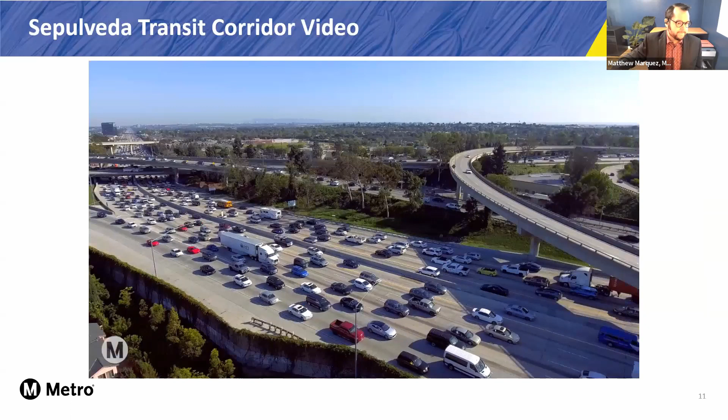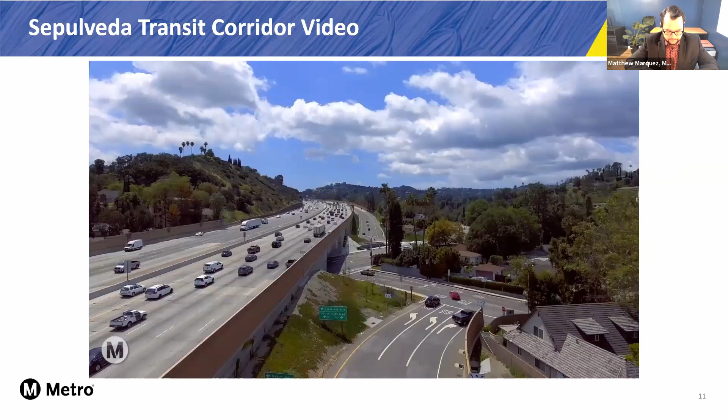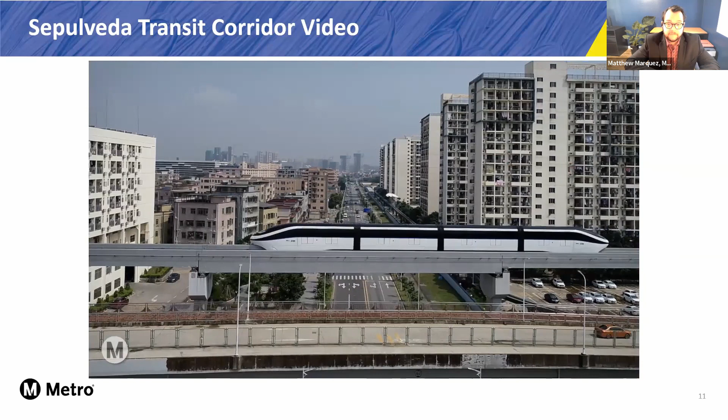Traveling between the Valley and the West Side isn't easy or fast, and traffic will only get worse over time. Metro has a plan to make it easier to get around. The natural barrier created by the Santa Monica Mountains makes this area complex and challenging, and will require innovation and multiple solutions. Metro is studying several projects in this area, including a new rail line with the Sepulveda Transit Corridor. The Sepulveda Transit Corridor project can provide reliable, high-capacity public transportation to provide an alternative to traffic and help take cars off the road. Before we get into the latest updates on this project, let's quickly catch up on our progress to date.

Metro completed a feasibility study in December 2019. The study looked at potential alternatives for traveling between the San Fernando Valley and LAX. In our extensive outreach for this study, we received more than 1,200 public comments. All of this public feedback and our technical analysis from the feasibility study has informed the range of proposed alternatives being advanced for environmental review.

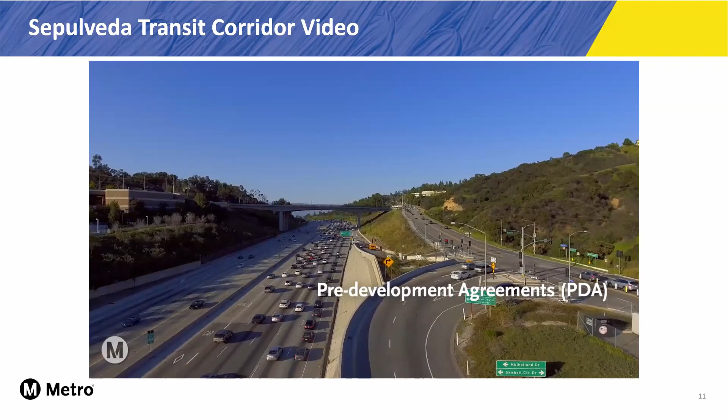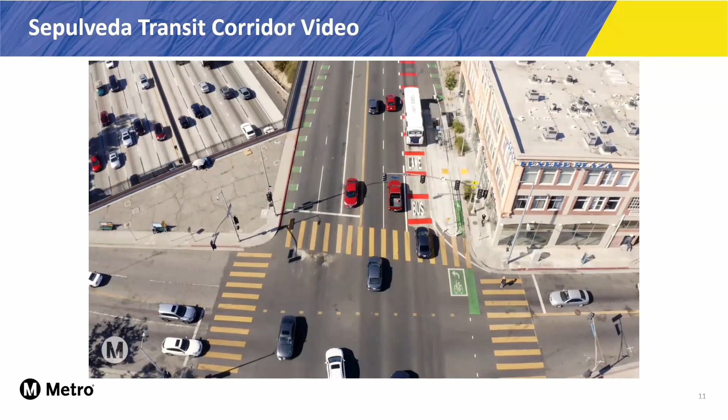In March 2021, the Metro Board approved pre-development agreements with LA Skyrail Express and Sepulveda Transit Corridor partners to pursue a potential public-private partnership to accelerate delivery of the Valley to West Side section of this project. The pre-development agreements, or PDAs, bring in teams that include designers, construction contractors, and financial partners to begin working with Metro earlier, when the project is still being planned, and long before we get into heavy construction activity. This early partnership can help to prepare designs that incorporate insights from construction and long-term operations and maintenance. This offers a life cycle approach to the project and prepares it for a possible public-private partnership.

The PDA teams worked with information from Metro's feasibility study to offer their proposed alternatives using proven rail technologies. We're now beginning environmental review. This is a formal, regulated process where Metro will study various aspects of each proposed alternative, including benefits, cost, feasibility, impacts, and any necessary mitigations. There are several points of community input during the multi-year environmental process. The Metro Board will select the locally preferred alternative, or final route and mode, for this project.

Let's look at the 6 alternatives we'll be studying in environmental review. They are identified with numbers. All alternatives begin at the Van Nuys Metrolink station, which will provide connections to Metrolink trains, as well as the future Metro East San Fernando Valley Light Rail, Metro G Line, formerly known as the Orange Line, and end on the west side at the Metro E Line, formerly known as the Expo Line.

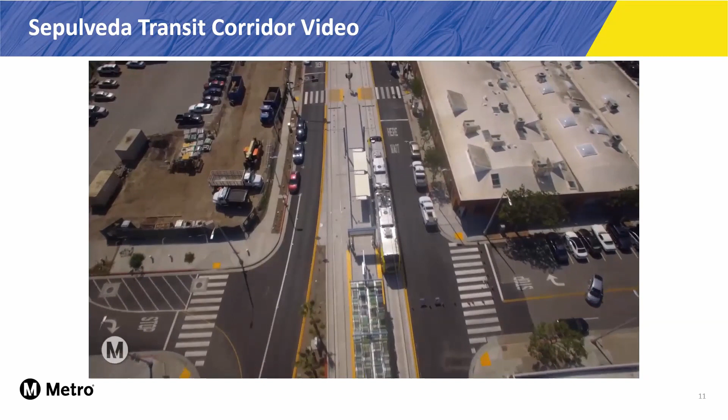Alternatives 1, 2, and 3 are monorail. Alternative 1 is fully aerial, traveling west before heading south along Sepulveda, with stops at the Metro G Line, Sepulveda Station, and Ventura Boulevard. Then it continues over the 405 through Sepulveda Pass with a stop at the Getty Center before continuing to the D Line Westwood VA Station. It then heads south to a stop at Santa Monica Boulevard to end at the current E Line Sepulveda Station. This alternative also includes an electric bus connection from the Westwood VA Station to Veteran Avenue, Westwood Village, and the UCLA campus.

Alternative 2 follows the same route as Alternative 1, but with an automated people mover connection to the UCLA campus from the UCLA Westwood D Line station. An automated people mover is a small-scale, driverless transit mode similar to what you might see at an airport. Alternative 3 runs along the same aerial route through the Sepulveda Pass and goes underground after the Getty Center to provide an underground connection to the UCLA campus.

From there, it connects to the UCLA Westwood D-Line station before returning to an aerial 405 route with a stop at Santa Monica Boulevard and ending at the E-Line Sepulveda station.

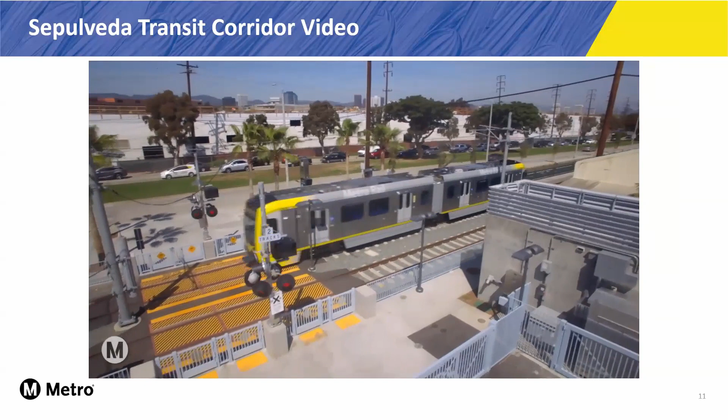Alternatives 4, 5, and 6 are heavy rail. Alternative 4 has an aerial segment along Sepulveda Boulevard before moving underground after Ventura Boulevard, where it continues underground for the rest of the route. This alternative would have underground stations at the UCLA campus, Westwood UCLA D-Line station, Santa Monica Boulevard, and the E-Line Sepulveda station.

Alternative 5 begins aerial at the Metrolink Van Nuys station and then moves underground along Sepulveda Boulevard for the rest of the route. It heads along Sepulveda with underground stations at Sherman Way, the Metro G-Line Sepulveda station, Ventura Boulevard, UCLA, the Westwood UCLA D-Line station, and Santa Monica Boulevard before ending at the E-Line Sepulveda station.

Alternative 6 is entirely underground. From Van Nuys Station, it heads south under Van Nuys Boulevard, stopping at the G Line Van Nuys Station and Ventura Boulevard. From there, it continues with stops at the UCLA campus, Westwood UCLA D Line Station, and Santa Monica Boulevard, before turning west to end at the E Line Bundy Station.

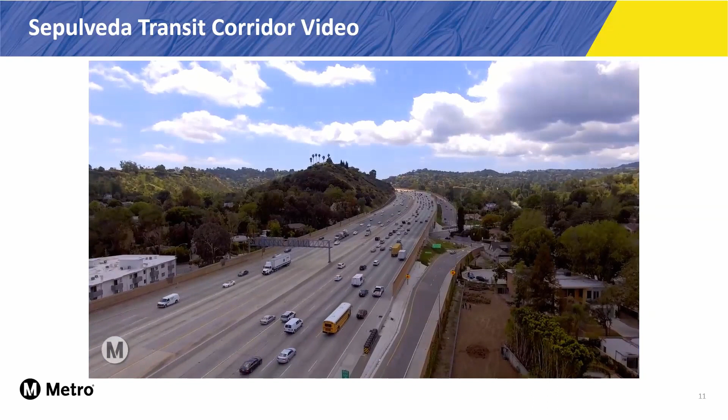We're now entering scoping, which is the first step in the environmental review process. During this stage, we want to hear from you about what Metro should consider and study as we prepare the environmental impact report for the Sepulveda Transit Corridor. Possible comments might include input on the destinations you think are important to serve, your preferences for transit in this area, and questions or concerns you might have about project impacts.

We will be conducting virtual scoping meetings where we can hear your comments. We will also take formal comments via mail, email, our website, or over the phone during the scoping period. We appreciate your interest in this transformational project and look forward to hearing from you.

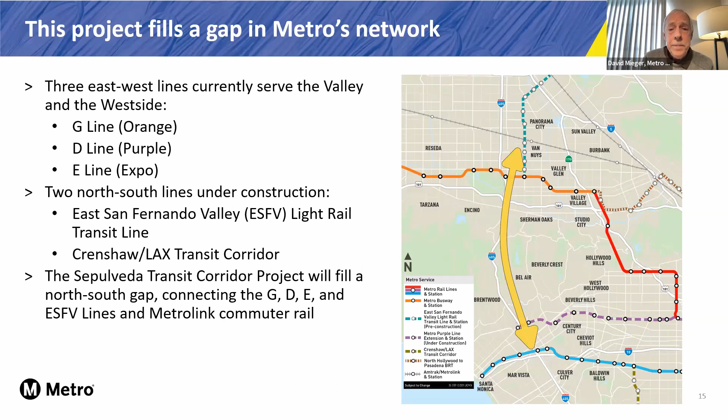We're not just looking at one improvement in the Sepulveda Pass. The speeds during rush hour, even during COVID, have been very limited, and our bus routes that run through the Sepulveda Pass can take over an hour to get through from the valley to the west side to UCLA. This needs to be addressed.

This project will help that tremendously, but we've also had success with improvements for cars through the Sepulveda Pass from our other projects. We have express lanes in other segments along the 10 freeway, the 110, and soon the 105, where during congested periods there's a pricing option: if you're in a carpool, you can ride in a lane operating at up to 45 miles per hour during rush hour. And with a carpool, you can generally ride for free.

But if you're a single occupant vehicle, you can pay in that lane, and the price is set based on the levels of congestion in order to price it and keep the lanes and the traffic flowing at the 45 mile an hour speed. We are looking at that for the central lanes of the 405 through the Sepulveda Pass.

We're also looking at the 405 Comprehensive Multimodal Corridor Plan, which looks at where the 405 starts way up in the North Valley, where it branches off of the 5, all the way through this area, down through the South Bay towards the Orange County line, looking at improvements to be made along the 405 — ramp improvements, on and off ramps, auxiliary lanes — things to address the bottlenecks without necessarily widening the freeway, but actually looking at improvements to the existing freeway that we have.

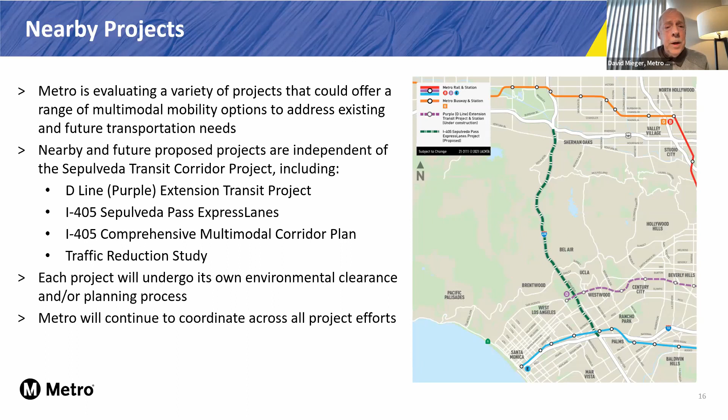Next slide, just to recap what was in the video about the studies we've been doing. Measure M is sort of the genesis. It was approved by the voters in the county by 71% to approve a sales tax to help pay for this and many other improvements throughout the county. That was what allowed us to proceed.

Then in 2017 and 2019, after the measure was approved, we conducted a feasibility study, which looked at a range of different options for transit service through the pass, and narrowed it down to 4 that we felt were the highest performing and most likely to be successful based on those early studies. They included heavy rail alternatives, which we see now, and also monorail. Those were the 2 highest performing options that were identified through that study.

Based on that, we solicited the private sector to submit proposals for this — what we're calling these pre-development agreements — where we're asking the private sector to give us their best input. These are firms and partners who have done these projects throughout the world, throughout the US. We want to tap their expertise to tell us what's the cutting edge, the latest technologies that can solve this problem, and bring them to the table early before we get too far into the environmental studies.

Let them develop their designs at the same time that we're working with all the community members to get the input into that, refine the designs, and come up with what we think is a good combination for a potential public-private partnership to deliver this line.

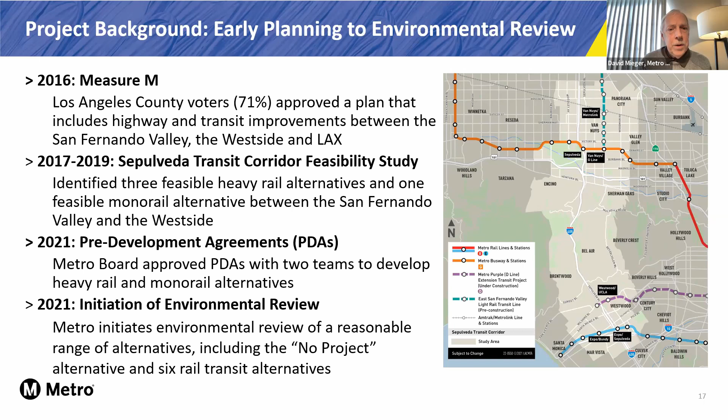And then the initiation of environmental review is the part that we started November 30th. We're in it right now, and we're going to be concluding on February 11th, but this is our 3rd public meeting that we've had on the project. With that, I think we have one more slide, and I'll move on to the next slide from this.

I would want to mention too, just that this project isn't meant to stop at the Wilshire Boulevard or at Santa Monica or at the Expo line. There is a phase 2 of the project. We're looking ultimately to get this project further south all the way down to LAX to connect to all the new improvements at LAX and provide a one-seat ride from the Valley to the airport. So that is certainly a phase 2 of this project, that we're building this project not to preclude, and we'll be looking at opportunities to do that.

With that, I'd like to turn it over to Kavita Mehta, who's leading our effort with the PDA firms and the engineering design, and let her tell you a little bit more about that part of the project.

Thank you, David. Good morning, everyone. I am Kavita Mehta, Deputy Executive Officer with Metro Program Management and Project Manager for the Sepulveda pre-development agreements.

So why are we doing a pre-development agreement for this project? We understand the need for this project in this highly congested corridor. What we also know is, given the topography and the built environment, the design and construction of this project is also going to be quite challenging. So with this PDA approach, we are involving contractors who build projects during the early planning and design phases, so we can make sure right from the beginning that we are designing something that can ultimately be constructed.

We also anticipate this PDA approach and early private sector involvement to bring about technical and financial innovation. The PDA approach allows us to think about cost effectiveness over the life of the project. So we are not just thinking about what is cost effective to design and construct, but what is cost effective to also operate and maintain in the long run. And lastly, it should allow for schedule acceleration. Next slide.

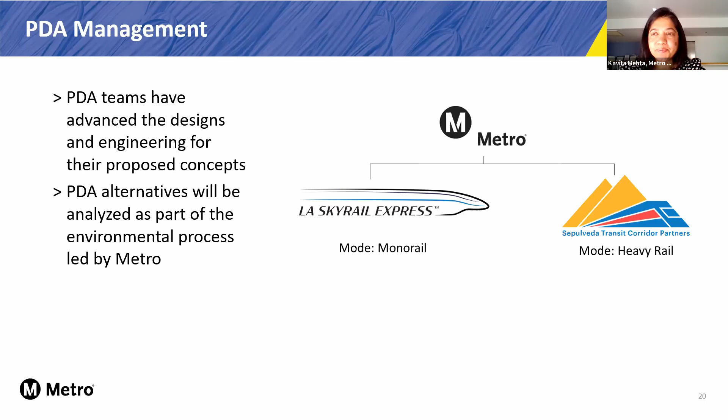And with that, I will hand it over to Jackie. Thanks, Kavita. Hi everyone, I am Jackie Su, Senior Transportation Planner with Metro Planning.

This leads us into a discussion of the purpose of the project. The purpose of the Sepulveda Transit Corridor project is to provide a high-quality transit service that effectively serves a large and growing travel market between the San Fernando Valley and the West Side.

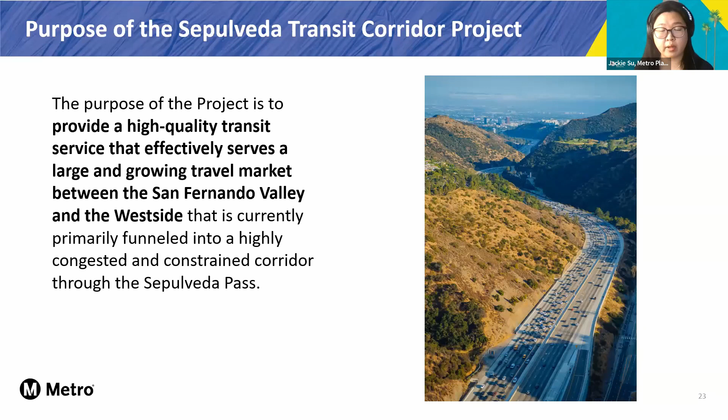The project goals and objectives will help guide the environmental process and identify the merits and challenges of each alternative. These goals and objectives might look familiar because they're informed by the goals and objectives from the feasibility study. Since that early planning study, we have updated these goals based on the work of the feasibility study and associated outreach, and we have also updated the goals to further emphasize equity and sustainability. The project has 6 goals.

The first of these goals is to improve mobility, which means increasing transit frequency, decreasing travel time between the Valley and the West Side, increasing transit ridership, prioritizing connections to local points of interest and destinations, promoting efficiency of transfer experience, and promoting non-automobile first/last mile connections, which means walking, riding, or rolling to and from a transit station.

The second goal is to improve accessibility and promote equity. This means improving access for equity-focused communities, which are communities in which a percentage of residents are low income, people of color, and have no access to a vehicle. This goal also emphasizes identifying and pursuing investments that serve those with the greatest mobility needs.

The third goal is to provide a cost-effective solution and to minimize risk, maximizing benefits to the public relative to cost, and maximizing potential eligibility for state and federal funding opportunities.

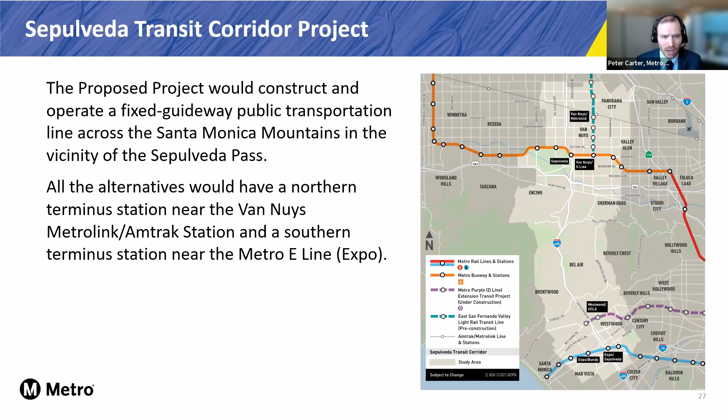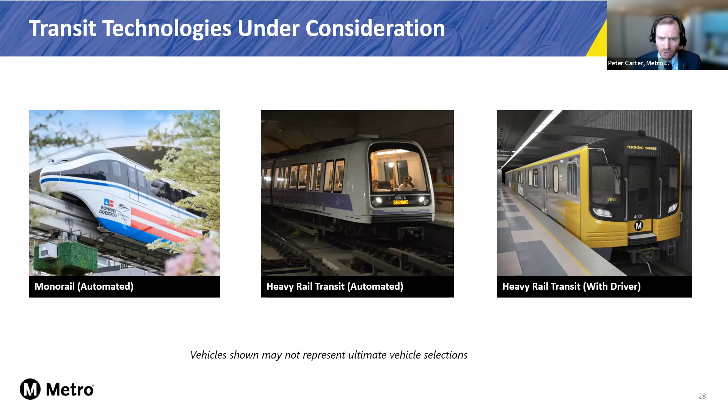We're looking at 3 different transit technologies across the 6 alternatives that are being considered. All of these transit technologies have sufficient capacity to meet the ridership demands of the project. We're looking at an automated monorail, an automated heavy rail, and the driver-operated heavy rail train. Next slide, please.

So the next 6 slides are looking specifically at our 6 alternatives. Alternative 1 is the first of 3 monorail alternatives. All of the monorail alternatives operate in an aerial alignment, which is to say that they are elevated up in the air on columns, and they're within the 405 corridor. What's different about alternative 1 is the use of a bus connection to access the UCLA area.

So the monorail alignment length for alternative 1 is 15.3 miles long. And starting from the south, the stations on alternative 1 include the Metro E line, Santa Monica Boulevard, the Metro D line, Getty Center 101, the Metro G line, Sherman Way, and the Van Nuys Metrolink station. The bus connection that I mentioned happens at the Metro D line at the Westwood VA station.

We also have identified potential maintenance and storage facility sites to accompany the alternatives. For alternative 1, the monorail maintenance and storage facility site is a place where these vehicles are being kept in good repair and stored when not in use. That site would be up at the Metro G line, Sepulveda Station parking lot, and a separate maintenance and storage facility site for the electric bus associated with this alternative would be co-located with the UCLA BruinBus facility on the west side. Next slide, please.

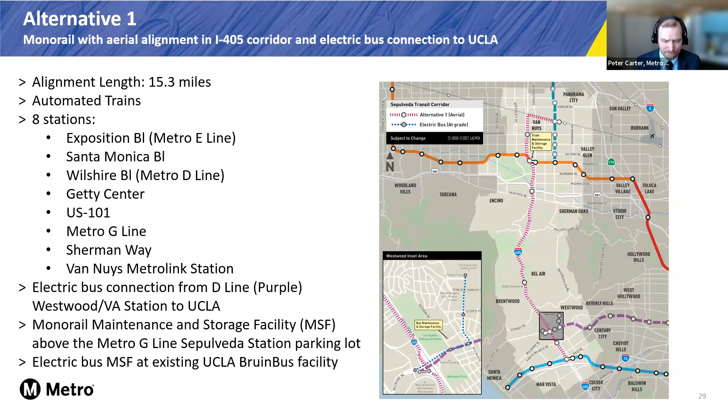Alternative 2 is our second monorail alternative, and the differentiating feature of Alternative 2 is the use of an automated people mover to access the UCLA area. The monorail alignment length is 15.8 miles long, a little bit longer, and you can see on the inset map there that the alignment comes out of the 405 corridor to about Veteran Avenue and Wilshire Boulevard, which is where it makes that connection to the automated people mover. The automated people mover then moves in an aerial configuration to access the UCLA campus.

The stations for Alternative 2 are the same as for Alternative 1, and the maintenance and storage facility site for the monorail is in the same location as Alternative 1. The MSF site for the automated people mover is located above the UCLA BruinBus facility.

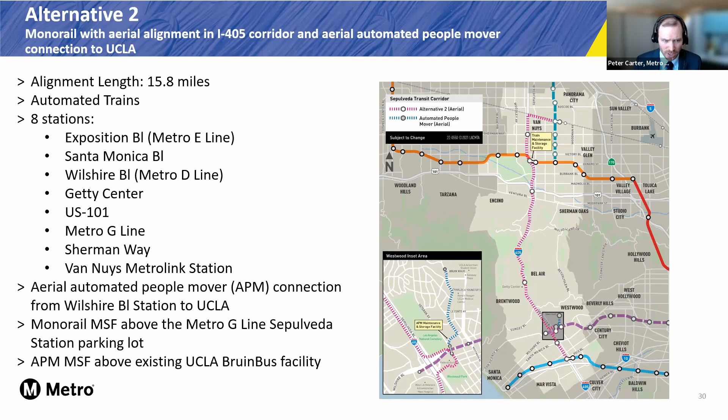Alternative 3 is our third monorail alternative, and what's different about Alternative 3 is the use of an underground alignment to access the UCLA campus. You can see that the monorail alignment length is a little bit longer, 16.2 miles, and there's one additional station, a station at the UCLA campus. The underground portion of this alternative is denoted by that thicker line type, and you can see that it starts from just south of the Getty Center to just north of Wilshire Boulevard. The maintenance and storage facility site for this alternative is in the same location as for alternatives 1 and 2. Next slide, please.

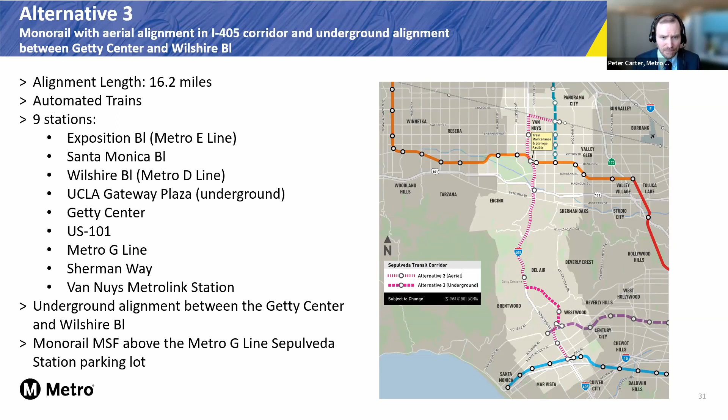Alternative 4 is the first of 3 heavy rail alternatives that we're looking at. What's different about Alternative 4 is the use of an aerial alignment along Sepulveda Boulevard in the valley. There are 4 underground stations starting from the south, and they include the Metro E line, Santa Monica Boulevard, the Metro D line, and a station at the UCLA campus.

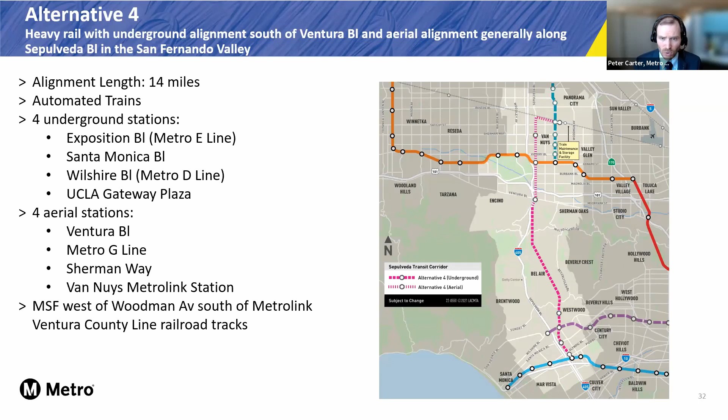And then on the other side of the Santa Monica Mountains, there are 4 aerial stations: Ventura Boulevard, the Metro G line, Sherman Way, and the Van Nuys Metrolink station. The maintenance and storage facility site for Alternative 4 is located south of the Metrolink tracks and just to the west of Woodman Avenue. Next slide, please.

Alternative 5 is the second heavy rail alternative, and its differentiating feature is the use of an underground alignment along Sepulveda Boulevard in the valley. The stations are the same, except they're all underground, except for the Van Nuys Metrolink station. The maintenance storage facility site for Alternative 5 is in the same location as for Alternative 4.

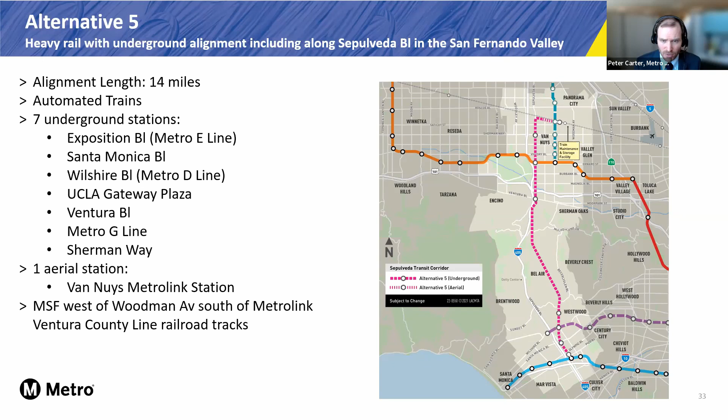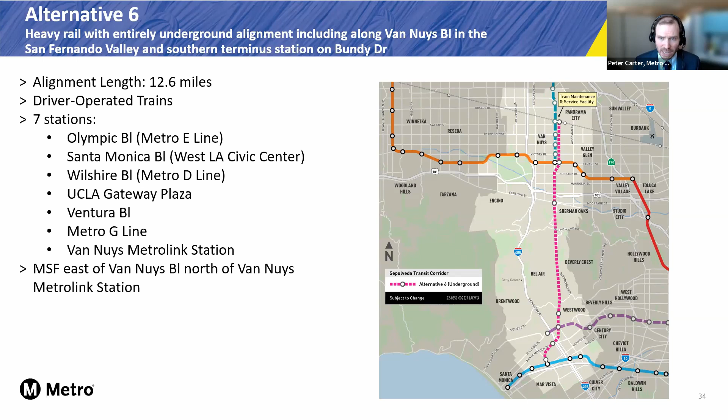Alternative 6 has the differentiating features of an underground alignment along Van Nuys Boulevard in the valley and a southern terminus connection to the Metro E line at Bundy. The 7 stations for Alternative 6 include the Metro E line, Santa Monica Boulevard, the Metro D line, UCLA, Ventura Boulevard, the Metro G line, and the Van Nuys Metrolink station. The maintenance and storage facility site for Alternative 6 is located north of the Metrolink tracks and just to the east of Van Nuys Boulevard.

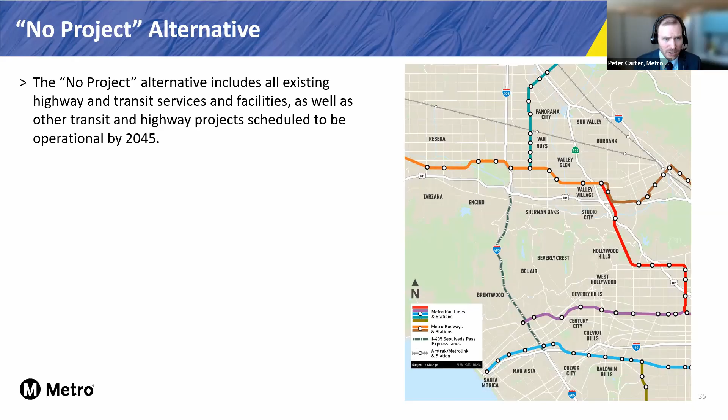So we call what we're in now the scoping period, and we're determining the scope of the draft environmental impact report, which is the first environmental document we'll be preparing to discuss the project with the public. There'll be a lot of information in there.

At the summary level, there'll be various types of evaluations, including costs like construction costs, right-of-way costs, and annual operating costs. We'll also look at benefits of the project, such as overall ridership, reductions in automobile miles traveled, and increased mobility for equity-focused communities. And we'll look at environmental impacts, or the effects of the project on the surrounding environment, including things like property acquisitions that might be necessary for the different alternatives.

At a more detailed level, we'll be looking at conceptual engineering plans for each of the alternatives, including track alignments, typical cross sections, station layouts, and right-of-way impacts. We'll also have environmental technical reports analyzing each alternative, and we'll get a bit more into that on the next slide.

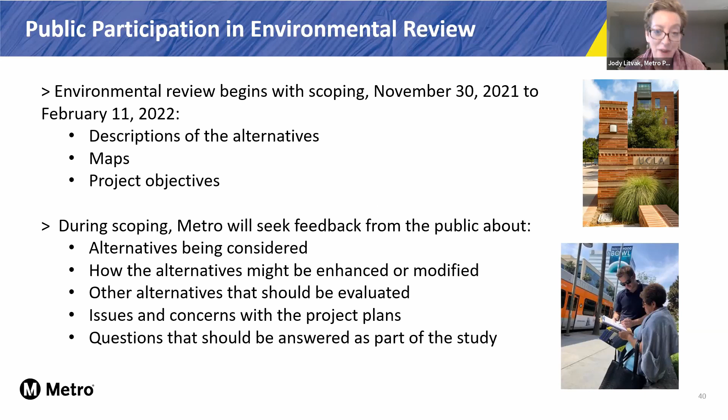While that's coming up, we've had a few more representatives of elected officials and key organizations join us that I want to note as well.

We have Lilia Monterosa from Congressman Tony Cardenas's office, Doug Mensman representing Los Angeles Mayor Eric Garcetti, Mehmet Burker from Councilmember Nithya Raman's office. We also have Kimberly Christensen from the Westside Neighborhood Council and Nuran Kalajian from the Woodland Hills Neighborhood Council.

When we began scoping, we issued a notice of preparation, the formal way you do that. We shared that with public agencies, in legal ads, and online with Metro's blogs. We've had a targeted Spanish media and social media campaign. We have our project website, our phone line, our email. We have an interactive story map. We have frequently asked questions that we're always looking to tweak and update. We have the project video that you saw earlier. We have an email database of more than 15,000, and we've put bus car cards on Metro vehicles and in many of our partner vehicles.